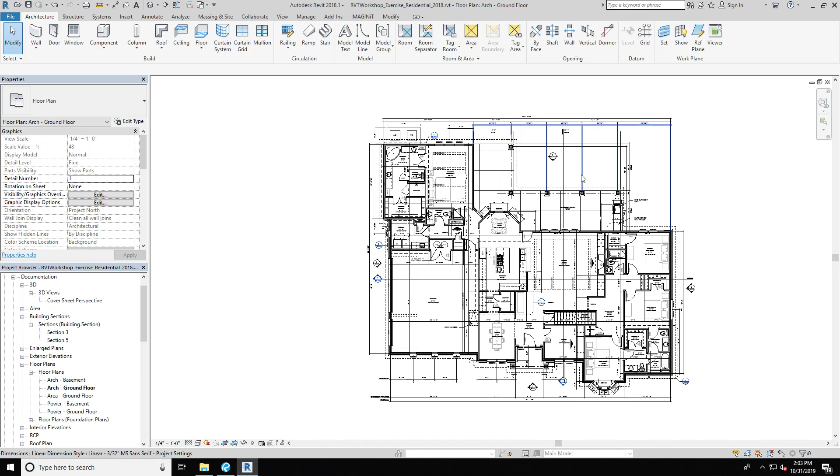This is a 3-bedroom house, and as you can see it looks super complicated, but basically this is a construction document view that will be placed on a sheet to help our contractors and framers build a house. Let me go to the 3D model view.

This is a 3D model. This house was actually built in Lubbock, and it's a huge site. I can't remember the actual acreage, but they're allowed to have horses. I modeled and designed this house in Revit for a young couple who were planning to move from San Antonio. As you can see, we can get pretty complicated with some of the elements involved—we have all our walls, our roofs included, and we can see inside that we have ceilings.

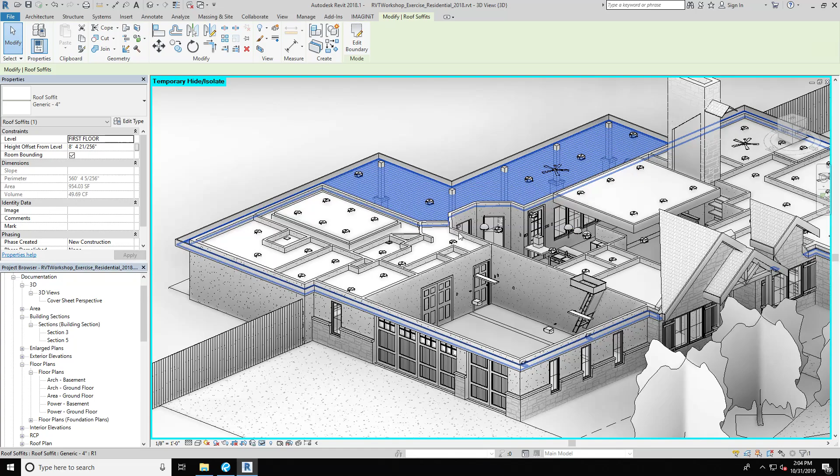Back to ceilings. We have all our ceilings in here, along with other model elements like roof soffits, interior lighting, electrical fixtures, doors, and garage doors. These are some generic model families that host or attach themselves to other model properties within the house.

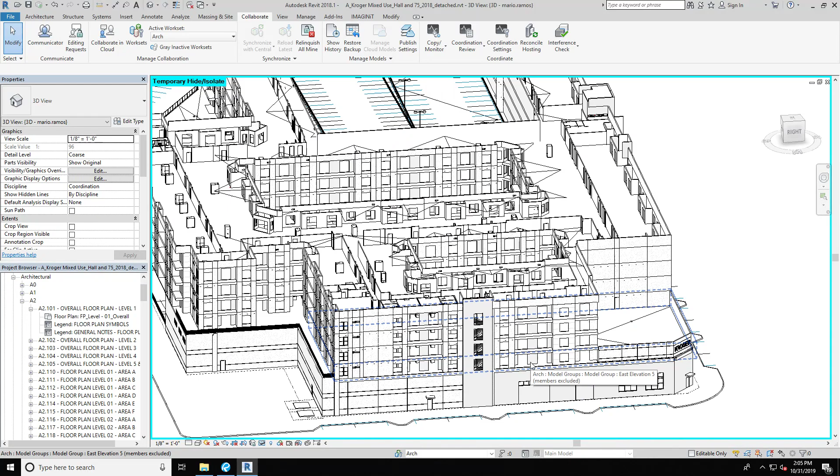The other project I'd like to show you is this huge apartment building we're currently working on. It's about 300 units and it's adaptive reuse. Basically, the apartments are being constructed along with an old Kroger that's being renovated, so it's like an existing building with a new addition being attached to it.

In here you can still see the same things go around. We still have our walls, and we should have our roof, though I think it's currently hidden. We even have our garage, some railings, and parking models.

Here with multifamily is where Revit can actually be a little dangerous in the wrong hands. It takes a certain level of knowledge of constructability practices. So if you know how to build a house, it's basically like learning how to build a house before you build it, because Revit can be a little tricky, and you have to get your construction tolerances right. In the most basic form, you need to know how to build it.

If you model it incorrectly, it can go very dangerously, and you can produce construction documents that could confuse your contractors and your clients. Therefore, whenever your framers are actually out there, they could build it very wrong, and it could lead to a very hefty fine or lawsuit. So you have to be careful.

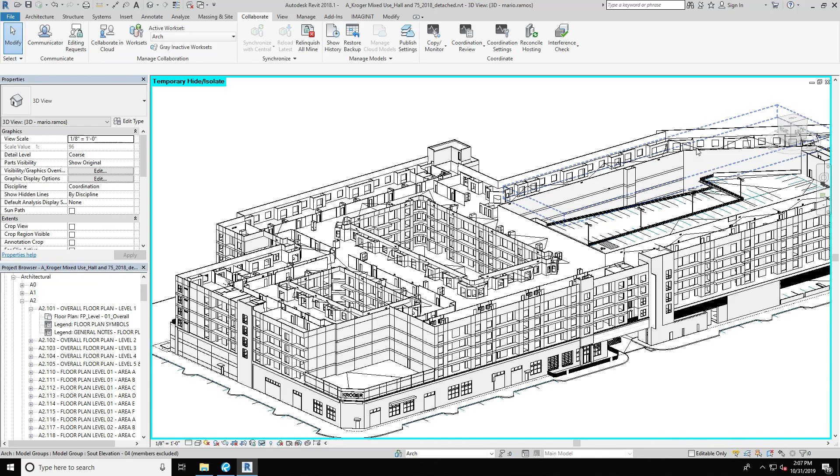Mainly what happens in our firm is that we'll have our most experienced Revit users, which currently in our office is about 4 or 5, ranging in experience building multifamily projects, retail projects, some warehouses, storage facilities, and offices, which leads into the next project.

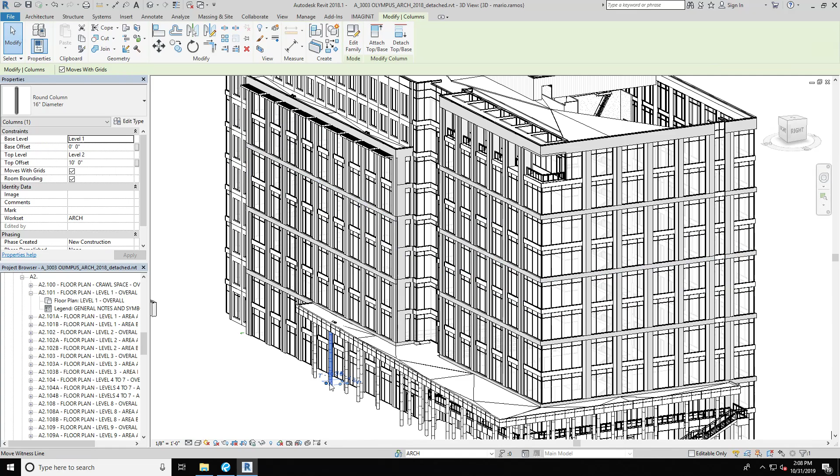We have our columns, and we also have our walls that vary in depths and heights. This wall is actually an assembly which a precast trade partner will build as a whole unit and deliver to the site in these 2-story spans.

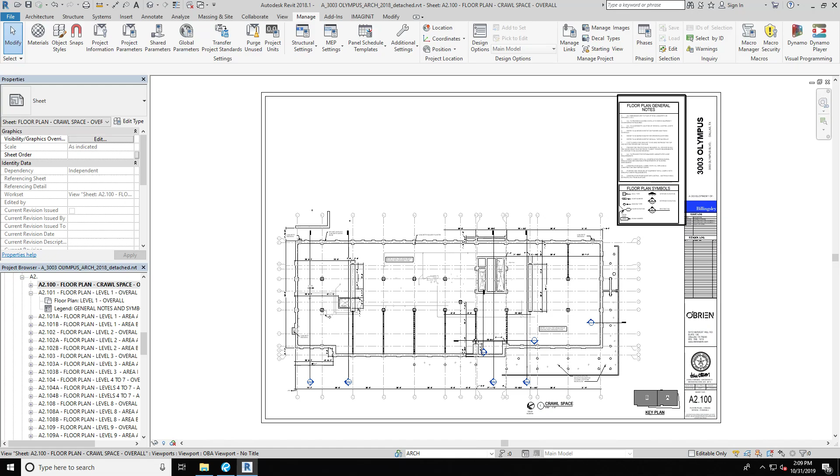So you can model a whole building in Revit, and then you can produce all your construction documents. You'll be able to put those same views we have on the side onto sheets and start annotating, adding all the other text elements, dimensions, and notes.

When it comes to creating sections, which is one I'll show you right now, you can create these really easily, and even if it shows you the most basic cartoon level of a drawing, that's okay, because the point is for you to come in after and start annotating.

My personal practice, my own way of building these things, is to build them with as much information as I can to reduce the amount of drawing I have to do later, therefore reducing the amount of hours I spend drawing, and reducing the amount of time we have to coordinate back with our people.

It really all depends too, and saving our client maybe some time. You need a team as well to help you do this. I didn't do this alone—this is a team effort, and we were able to knock it out in maybe 2-3 months.

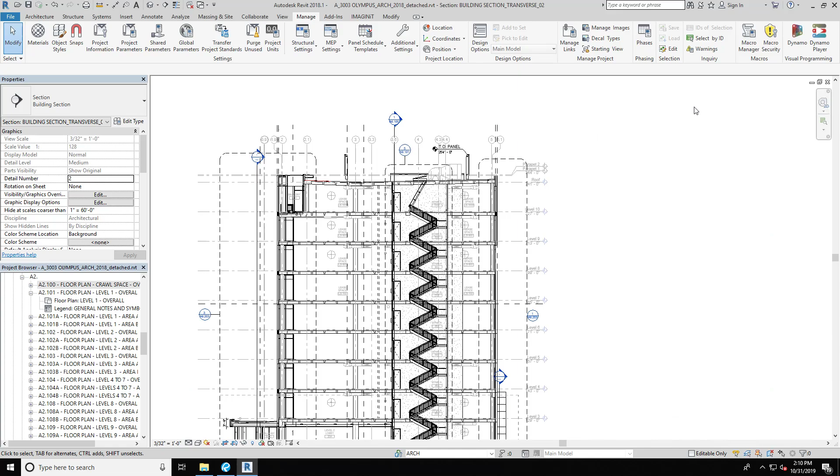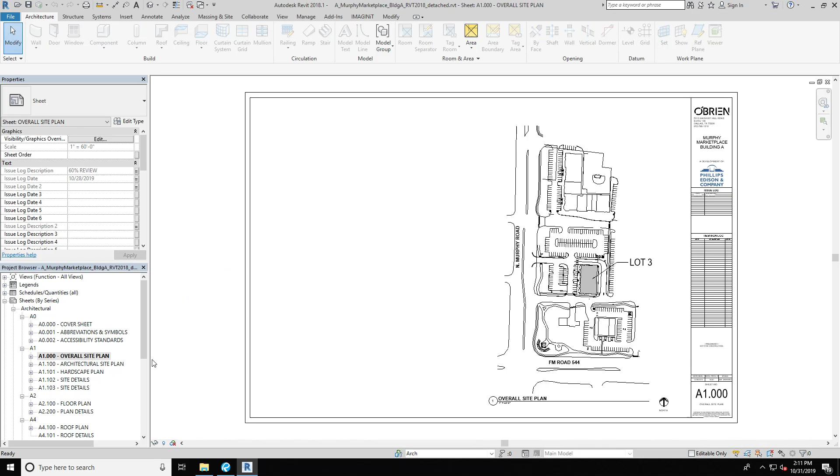And there I'm able to create all these views to show where it is in site, show an architectural site plan, and show all the details of the site. It's still bare bones. And then we have our floor plan with all the annotations and dimensions and notes.

The same thing over here on our roof. We have a roof plan that tells them where a mechanical zone is, where a roof access ladder is, where our cornice is. All this detail gets added afterwards. We have our exterior elevations, which should be popping up.

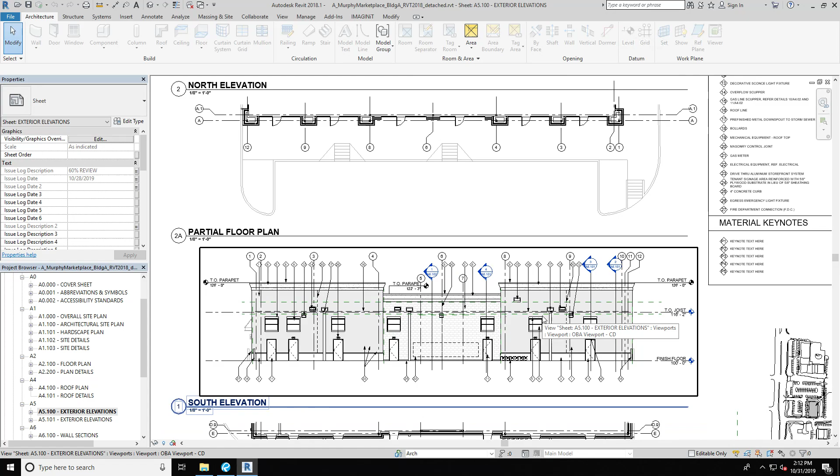As you can see here on our exterior elevations, we're able to show everything that needs to be added on here to help ease our contractors and tell them specifically what these materials are, what tolerances to follow, and then hopefully reduce the amount of questions and RFIs that we get after we submit for permit.

It also helps coordinate with our structural and MEP consultants, because they're able to

Excuse that, I think I closed the window for a second.

We're able to coordinate with them now in 3D and be aware of where things aren't aligning, like a mechanical duct is in the wrong spot, or a column is in the wrong spot, or a structural beam isn't working, or we aren't able to do a thing because of

gravity forces. We're able to coordinate that a lot easier versus 2D drawings in the past, where we would have to guesstimate where things were just by seeing them in plan and visualizing where they would be in a section, I guess, in 3D space.

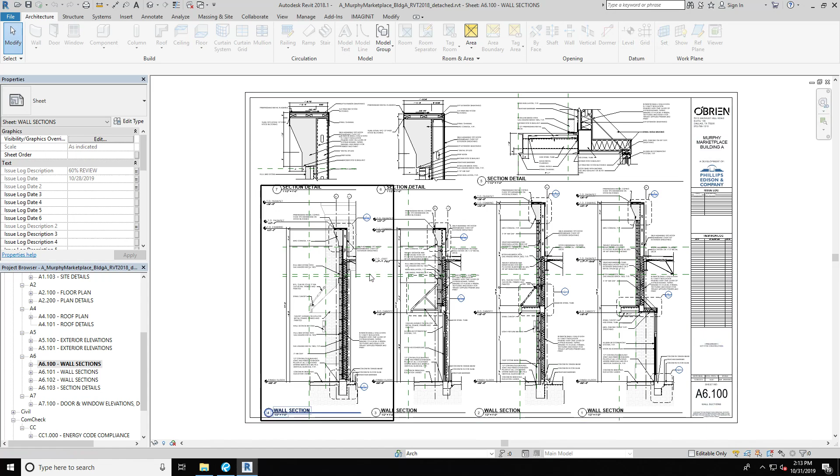So from all that, we're able to create all these sections, and as you can tell, I could select all this stuff here, filter it, and say I just want to hide all the detail stuff. Actually, let me do it backwards. So this is actually most of what's modeled right here. Everything else is a detail component that we get to add on top of it.

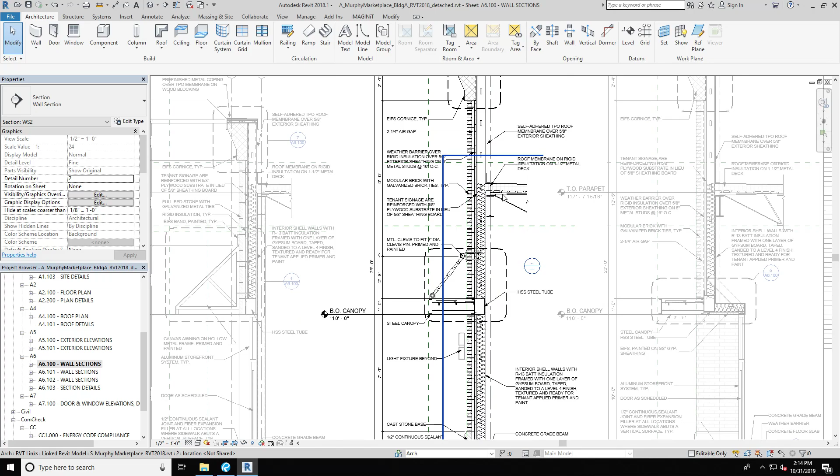And this is our structural model, which we've loaded in the back to coordinate with them and have them tell us where our top of joist elevation should be. We actually tell them, they just match us.

And then from these views here, we're able to create new views where we'll come back in and detail it. Refine the detail, actually, is a better way of putting it. We'll refine the detail to coordinate with the people who will be building this so that they can get it right.

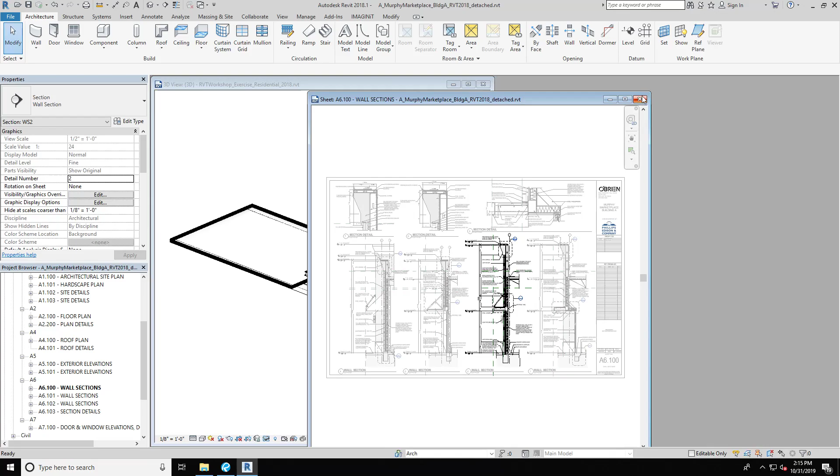Now, I don't want to spend too much time on that because we actually do have to cover how to model most of these things, and I want to be cognizant of your time. So let me go ahead and close all these things. Just give me a second. Close. Nope. Great. So real quick, let me see what's going on. Sweet. Okay.

Alright. So for this assignment, it looks like what we have to do is build a 32 by 32 foot house. And we'll start off by creating a new project. And the easiest way to do that is, we have Revit open. Let's just pretend I already went through and opened the shortcut. And so when you go to open up Revit, this is the first page you'll see.

And what you'll do is go select a new project, and the first thing you'll get asked is to pick a template file. Template files are just full of all the information you'll need. They'll have your walls, roofs, floors, and other basic detail and model components that you'll need to help you model your projects. In this case, we don't have any templates loaded because our template files have actually been moved to a separate location.

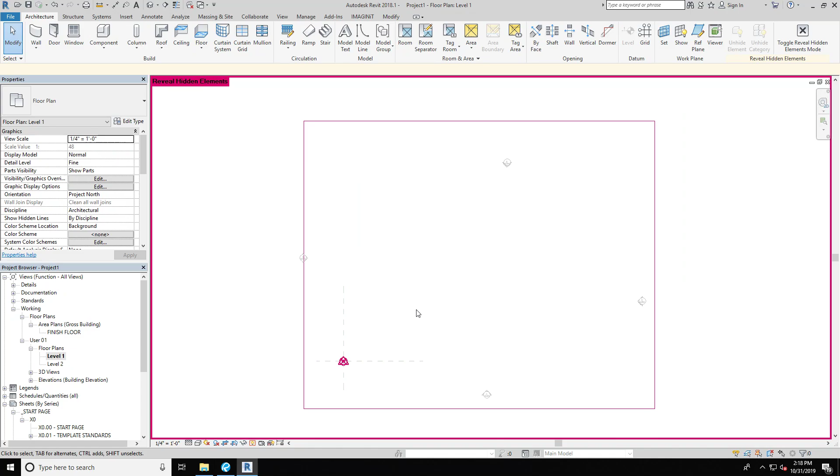But what I want you to be cognizant of or aware of is these two little things here, the circle and the triangle that keep shrinking the closer I zoom into it. Those are your project and survey points. And basically in 3D space, or if you were to think of your coordinate system, that is your 0, 0, and this would be your y, and this is your x. And of course, jumping from the screen to you is your z axis.

Hold on, what's going on? Colt, something wrong?

Oh, that's a great question. So the defaults are, yes, they're construction, architecture, and MEP. The best one to use, it depends on what firm you work for. If you work for an MEP engineer, then you would start with an MEP template. If you work for a contractor, you would use a construction or architecture template. And if you work for an architect, you would use architecture.

Sorry I didn't cover that. That's a great question. I should have covered it, because those are the templates that come out of the box with Revit. The one that I opened is a personal one. They should go ahead and use the architecture one. Is there anything else?

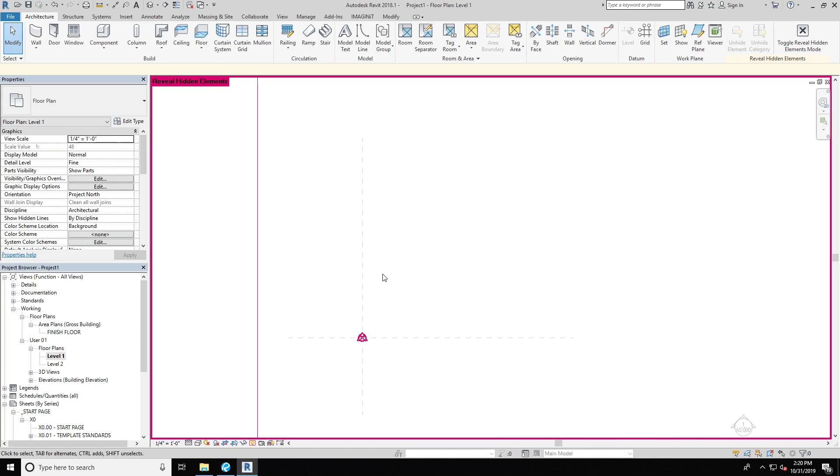Okay. All right. So I think that should cover it for templates that you should use. Okay, great. I hope I answered that. My bad.

All right. So where was I? So I was talking about the project points and the coordinate system. These are your reference points. They help coordinate with all of your consultants. So whenever you share or exchange models, which still happens, you're basically trading your models back and forth to coordinate how things align, to coordinate your structural grids, your structural columns, floors, roofs, anything of that nature with, let's say,

your structural consultant. Your MEP consultant would only be modeling ducts and plumbing and wires. Maybe not even that. That's a whole other level that they may or may not want to get into. But when they're modeling all these things, you'll be able to see the pipes running through your building, all the ductwork. If they're crashing through something that it shouldn't be crashing, then you can point it out and have them fix it. So whenever you reload the model, you should have things as they are working.

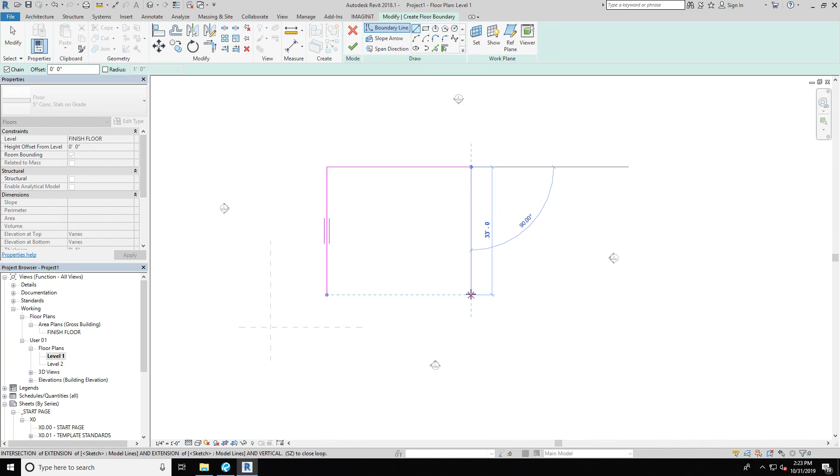Alright, so let's model a floor. To model a floor, we go up to our architecture tab once we're in the project, and we'll go over to floor. Now in the floor command, everything else is kind of grayed out, and you will mainly be focusing here on this thing to start drawing it. You can start by drawing a line and then carrying it over, so you have a box. Basically the dimensions aren't correct, but if you pick your lines, you'll have these temporary dimensions that should pop up, which you can then adjust. Whichever one you pick is the one that will move.

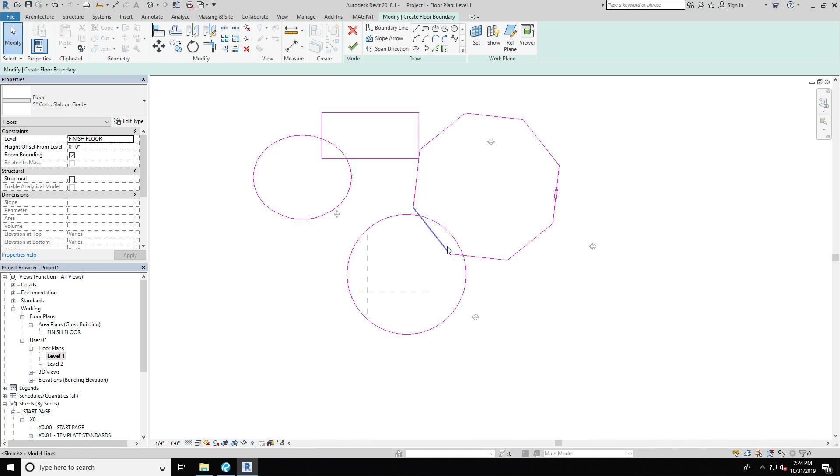But besides that, you can also draw circular floors. You can draw polygonal floors; you can change the sides over here. So let's say we want an 8-sided house. You can draw oval floors. There we go. And you can draw squares and rectangles. Now let me go ahead and delete these.

So for our purpose in drawing this house, we'll start from our point down here at the 0, 0, and then carry our floor slab edges this way. So this one is 32, we just want to make sure, and this one is 33, but we'll change it to 32. And there we go. And to finish the command so that you start modeling your floor, you just select the green checkbox, and there we have a floor. We can see it in 3D, and that is what it looks like.

Now let's say you want a different type of floor. You select it and you go to your properties tab over here. And this tab will show you the properties of all the model elements that you will select in Revit. And currently we only have one floor type, which is a 5-inch concrete slab on grade. But let's say we wanted to make it 6 inches. Well, we can do it by, let me do that again. We can do it by selecting it.

We hit this edit type button, and then we get this dialog box. And as you can see, it's a system family of floor. Here's the floor we selected, and we have these options to rename it and duplicate it. We'll want to duplicate it, and then we'll name it 6-inch concrete slab. And then go back.

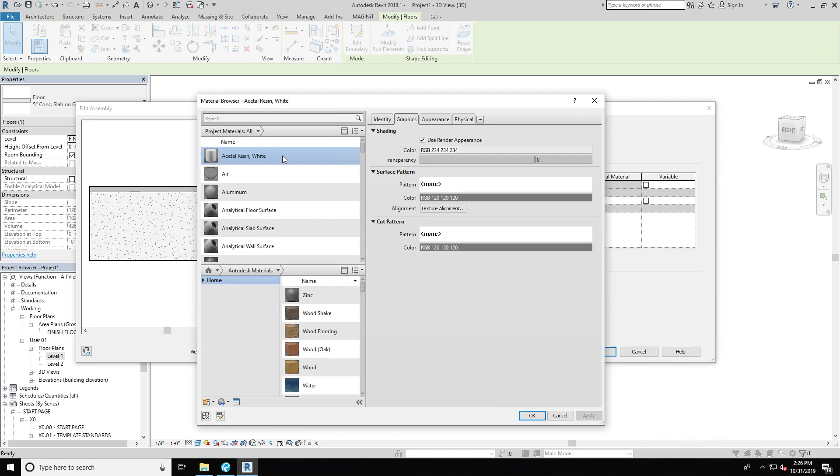and we can select a material by hitting this little guy in the material column, and then we'll get all these material types in here. I don't know necessarily what kind of glue they need, but let's say it's whatever this material is. We'll make it up for now. So we have a 1/2 inch of that, and you can see that over here in our preview box.

Well, let's say we also need to show our carpet. That may be another 1/2 inch. And there we go. So we have another 1/2 inch of something. It's not necessarily called carpet yet, but we can create it. And carpet, I do know, is in here, so we can find it. And there it is down there.

We'll double click it. If it's down here, you just need to double click it or hit this arrow so that Revit can pull it in from the program files into the project so that you can use it. Then once you've selected it, just hit OK, and there we go, we have carpet. So now we have a 6-inch slab with carpet.

And currently the view setting is set to show just a white line, which I think is called hidden lines, and we can change it to be more realistic or show shaded colors. Oh, that was it. Huh. Well, there's hidden line, and this one basically shows you the white background or white objects, and a wireframe view. And then we can also change the settings from fine to coarse to medium. But let me change that back to hidden line.

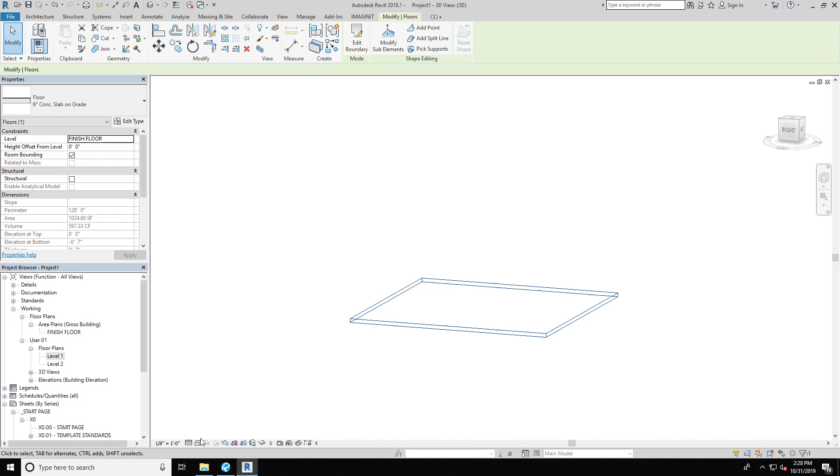There we go. So we modeled our floor, and it's 32 by 32 as we remember. But now we have to create our walls. And let's say they're 2x4 studs. We'll go back to our floor plan, and then we'll go to the architecture tab, and we'll select a wall.

There are many options on how to create a wall. Oh, and there are structural walls as well. We won't focus on these now. We'll only focus on architectural walls. And so as you can see here, for walls we do have a bit more. We have our basic walls, our curtain walls, and our stacked walls. Our basic walls, in the shortest terms, are just basic. They are one layer and one material carried on vertically.

Your curtain walls have the options to add panels and other model elements like the mullions, the glazing, and anything else you can think of. One thing that I do want to stress is that even though Revit says these things are these things, you can also challenge that and use certain model elements in place of others to just create something.

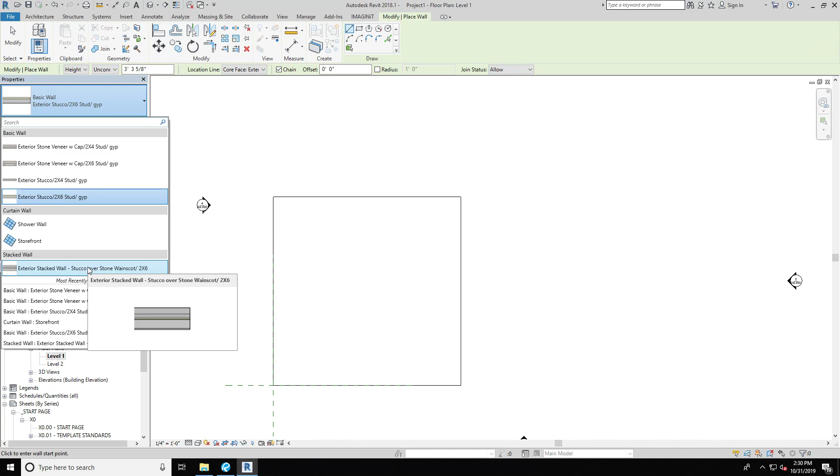And then our stacked walls are a group of basic walls that you can stack on top of each other. You can stack as many as you like. You can go from 2 to 20, and many people use them when, let's say, you have a wall that has a stone base and a cap, and then on top of it, which this one should have but doesn't, we'll add it. Oh, it should. Why doesn't it have it? What's the height?

There we go. And then it has a basic wall of stucco above it. Now let me delete it. What I did there, actually, because I haven't covered this yet, was tell the wall in its properties that its base constraint is the first floor, which is this work plane that you see down here, which I will show just now. This is our first floor work plane. And that's our base constraint for this wall, which you can see reflected here.

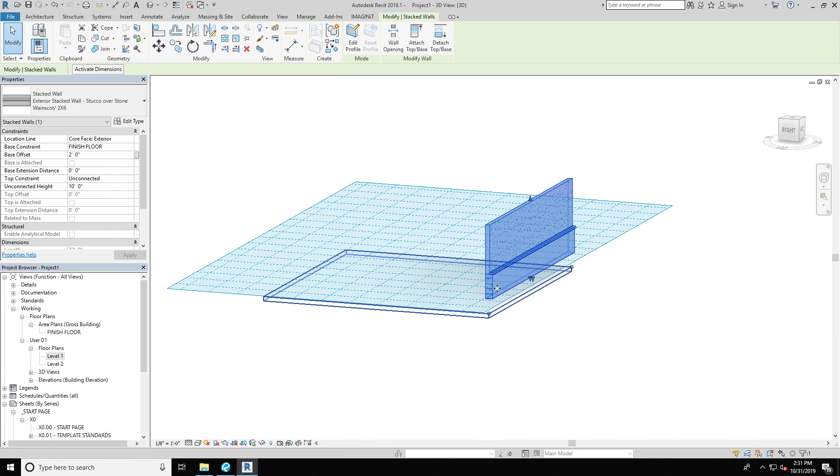You can change it so that the base constraint is now the top floor. And then it has a base offset, which you can, if you wanted to, offset it, let's say 2 feet from that plane. And no matter how many times you change that level, so let's say this plane is no longer, let me go to an elevation to show that. Let's say that plane

Hold on, I'm being told I'm a little fast. Colt, do I need to recover anything again? I forgot the lag time. Will do. So let me change this one. Yeah, let's do that.

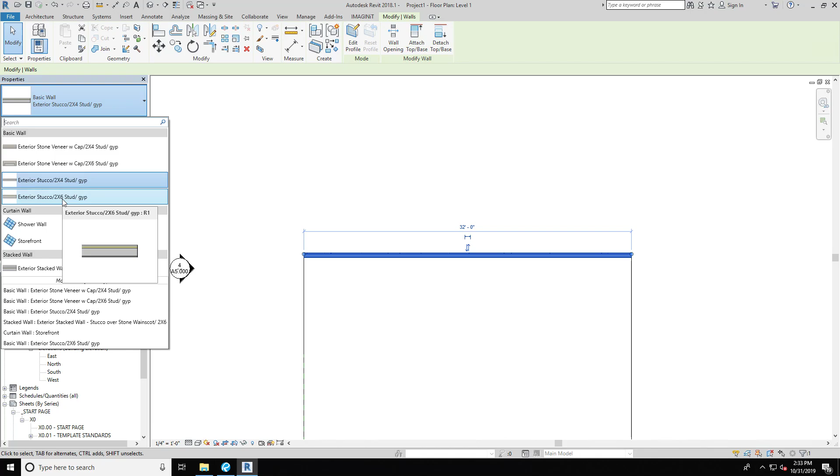All right, so let's take a step back. We're gonna draw a wall, and we've already chosen the wall. It's already built and assembled the way that we need it. Let me change that back to 0, and I'll change our top constraint to be our top plate. So that means that our wall will stretch from the first floor to the second level, which is our top plate. And what we want to do is draw the wall, but we want to draw it with this edge of the stud line at that edge of the slab.

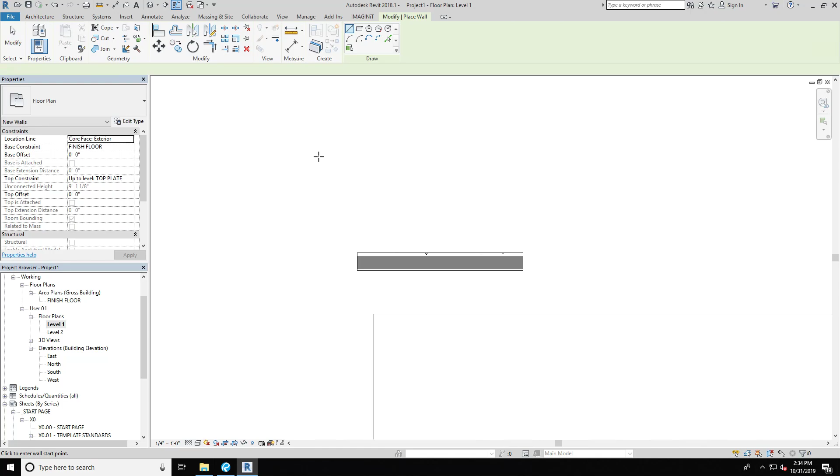The reason being is because the normal setting for these walls is to draw the wall at a center line. And basically what it did there is draw the wall taking into account the entire width or depth of that wall and giving us its center. So we drew it from its center, versus this wall, which is at the edge of the stud where we need it to be. And this type of wall alignment is called the core face exterior, which will draw it at that edge.

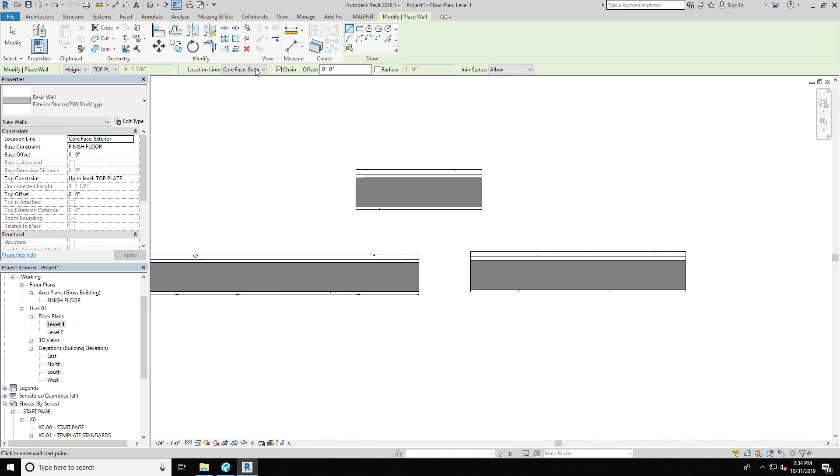But let's say we want it to be the interior. Well, that would be the core face interior. Now we've drawn it, but with that edge as our defining line. And we can also do it from the finish face. That did it from the exterior side of the stucco. We normally don't want to do that, especially when it comes to stucco walls, because stucco varies in thicknesses that it really doesn't help.

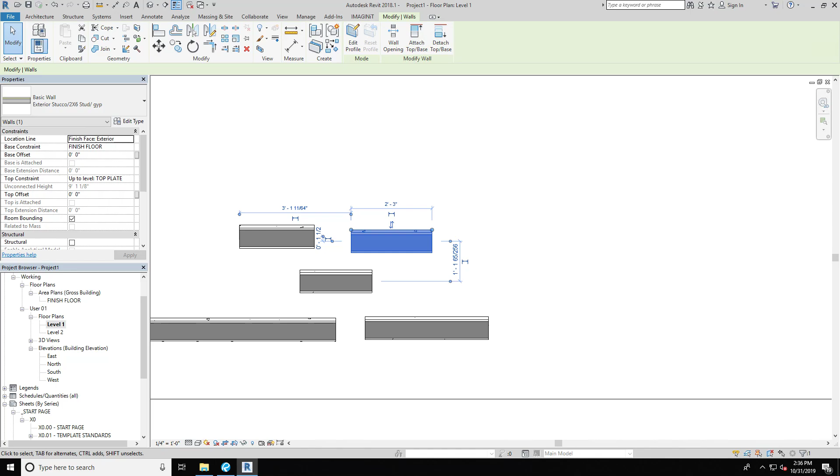Okay, so I think I covered the wall alignments. I'll cover just the last one just so that we all know, because there's a few more that we need to cover. So we covered the wall center line, we covered the finish face exterior, the core face and core face interior. Remember these because I'll run through them a little bit more, how they relate to how you build your wall. So the last two we need to cover is the finish face interior and the core center line.

So the core center line is actually the center of your core, your core being the assembled part of the wall that is set to be inside the core parameter, something that I'll cover in a little bit that will make more sense. But you can also draw it from there. And the last one is the finish face of the interior wall, which is right there. It's drawing the wall from the inside of the gypsum board, and that's okay.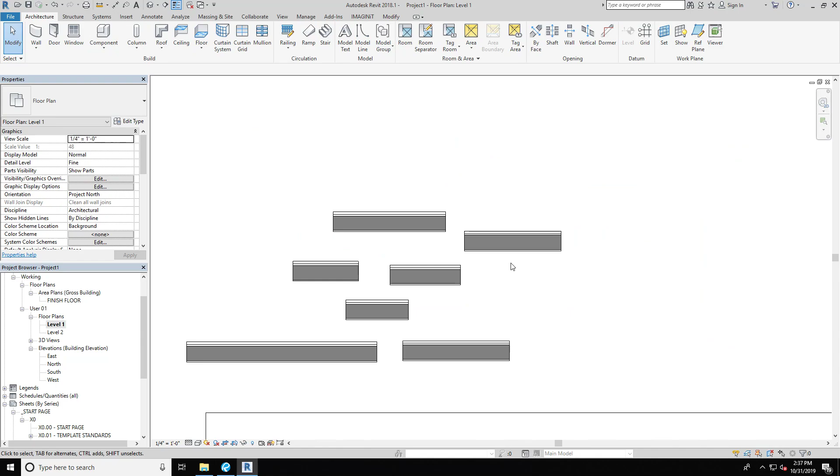Best practice is to model it from the core face exterior or interior, depending on how you work. The reason I say it's the best idea is because normally your structure doesn't change, but your finishes will. So let's say, for instance, your client may want stucco one day, but then the next day he changes his mind and says he wants metal panels.

And if you have a couple of walls set to finish face exterior and you change the materials for all those walls, they will flex very differently, and it will annoy you, and it'll create some errors that you may not want. So let's say we drew all these walls. These are interior face. Instead of redrawing them, we can change that by the location line right here.

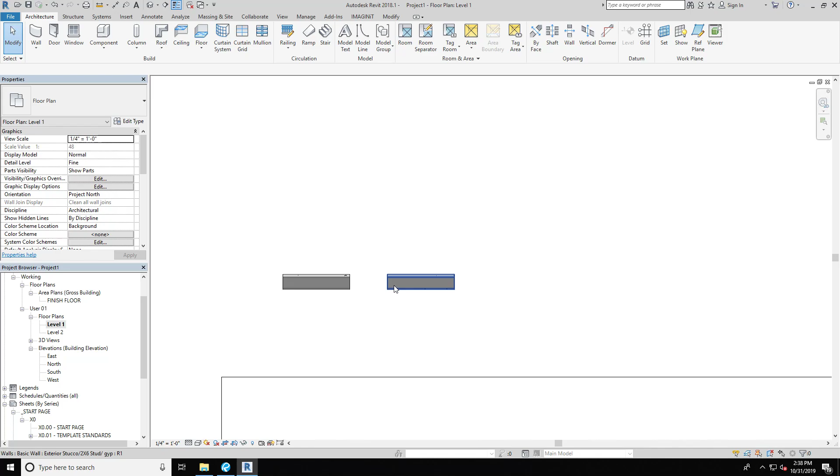We wanted core face exterior, and there they go. They're both changed. Now let's say we ran into that instance of our client wanting metal panel, but let's change this one to be the center line of the wall. So there we go. That one's center. This one's the exterior core face location line.

Now let's edit the type. This is how we build our walls, and we get a preview. Well, we don't normally get a preview, but we can do it by hitting the preview button. And then you'll see we have our named wall here. We can duplicate it, but let's say we want to change this type.

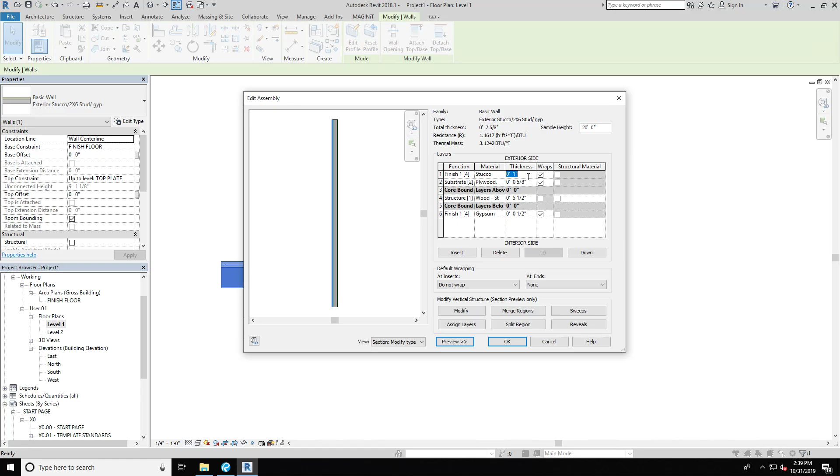Let's say we no longer want the stucco to be 1 inch. And let's say instead of 5/8 of plywood, we want 3/4 inch of plywood. And let's say, for instance, too, we don't want to use 2x6s, which are 5.5. Let's say we're using 2x4s, and those are 3.5. We're using 1/2 inch gypsum board on the inside, 3/4 inch plywood sheathing, and we'll keep that as 1 inch. I don't want to mess with it.

We'll hit OK. OK. And you saw how the walls flexed. This one flexed by bringing in the materials towards the edge, the core face exterior edge. This one flexed from the middle, so it brought all those materials inward. They compressed inward rather than change as this one did.

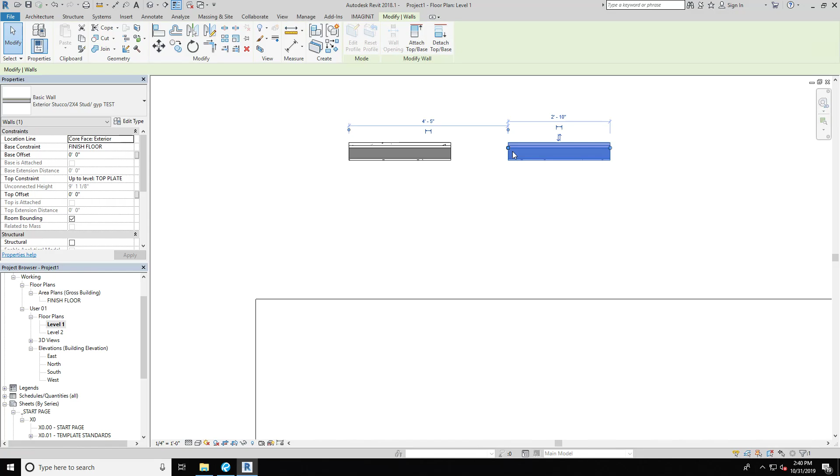So now let's build our wall. Let's say it's that 3/4 inch or that 3.5 inch. Before we do that, let me rename it. It's no longer a 2x6, it's a 2x4. Oh, we have that one. 2x4. Test. Boom. Oh, and just so you know, your wall command is WA. So you don't always have to go up to the button and find it.

Now we can make sure that we're going to draw it from our core face exterior by going here. It's going to go up to our top plate level, and then we can start drawing there. And as we pull it, we can see the edge of the stud is going to the edge of that slab, and it's 32 feet by 32 feet. And there we go. And they all joined easily.

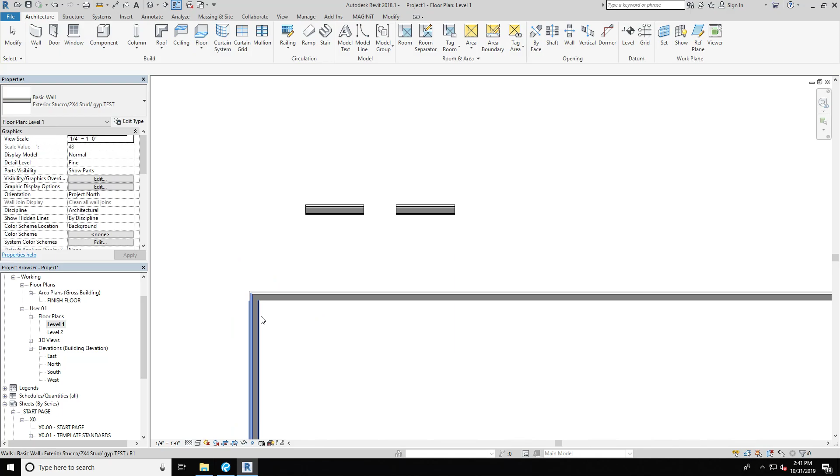So normally this is how this house would be built. We have our slab, which then we'll have our footings beside it. And we'll have our walls with only the stud sitting on the slab. And then we may build a second slab edge or a ledge for our finished material, if you choose to do so. It's not typical.

Colt, before I continue moving on, are there any questions about walls, location lines? Okay, well then I'll go to level 2.

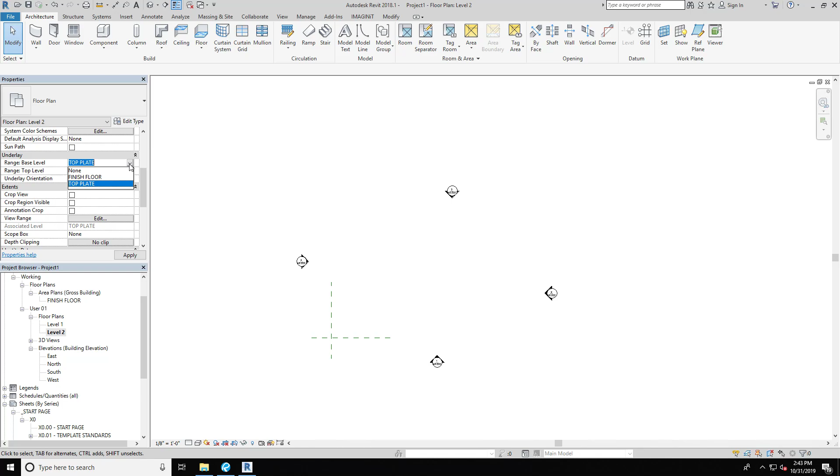Right here I'm on my second level, and this level is where I'll be drawing our roof. And as you can see, we can't see what we modeled previously below. That's because our work plane is set to show only what we have here, but that's okay because we can go down to our properties window, go to this underlay tab, and we can have that floor plan or view that we're on display the view below it, and so we're able to see what we modeled beneath.

Now let's say we want to model a roof. Well, the roof is right here, and same thing, it's still in the architecture tab. Scroll over a couple of buttons and we'll find our roof. And the roofs work similar to floors, where you can draw them in plan. You hit the button, and then you'll go into the command, and this is mainly where you'll be working in the draw tab. And you can do the same things, same commands as the floors.

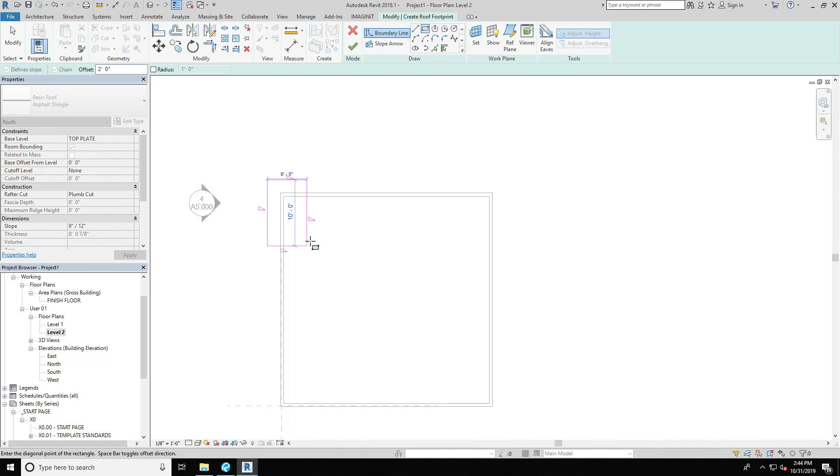You can draw them by rectangles, circles, polygons, ovals, but really what we want to do is just draw a square roof to match what we have. And then we can offset our line, let's say 2 feet from where we draw. So let's say that's our point of our exterior face of the wall, and we drag it to the other point. And it was smart enough to know that I wanted to draw the line offset 2 feet from that face.

So, but you can do it multiple ways, and the command will go away once you get rid of it. But this is what we would have drawn. But this is our 2 foot offset, or 2 foot overhang. But it also has the command to give it an overhang. Okay, so let's see, back to 2 feet. And there we go.

Okay, so there we go with the roof. To answer your question, Colt, we don't normally build with generic walls, because if we already know what type of materials are going to go in the project, we don't want to build with something that has no real materiality. Generic walls are basically like marshmallows.

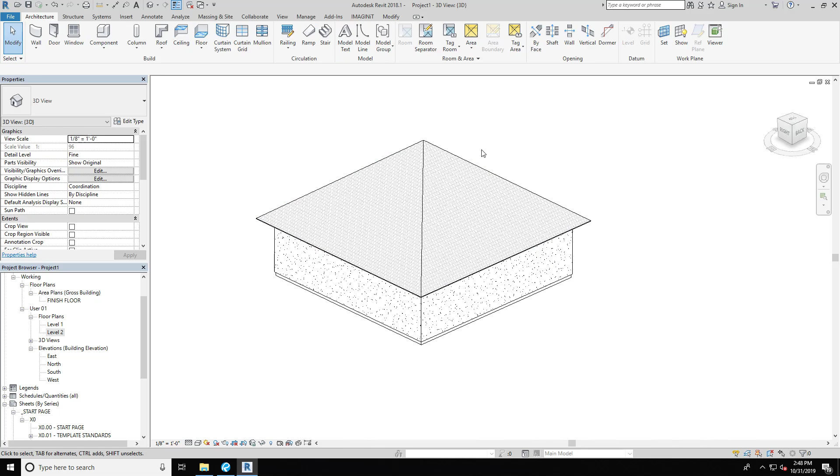So now that we have this weird hut, we're able to see that this roof was modeled all to go at a slope of 6/12 from the edge over here up to that point. The other walls, the other sides of the rectangle that had that defining element, also went up to that level.

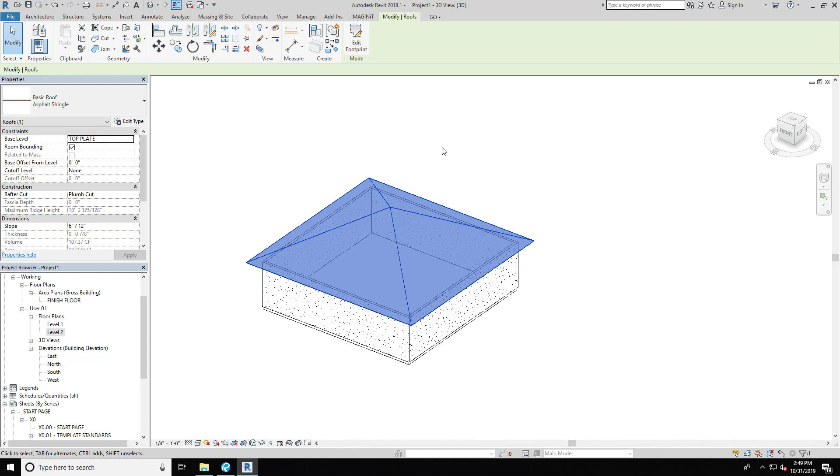And then we can change that here if we wanted to. So if we wanted to go to a 6/12 roof, you can change it there too. But let's go back to our roof to edit it by going up to Edit Footprint. So we know that this is going to go up 6/12 and this is going to go up 6/12.

But let's say we don't want it. We want a regular gabled roof. So we select both lines. To select both lines, you just hold down the control button and you see a little plus sign next to your cursor, and that will select both items.

Then in order to remove the slope from those lines, you would uncheck this box here, the define slope. Once you uncheck it, you can hit OK, and there you'll see your roof. Your roof is now a gable.

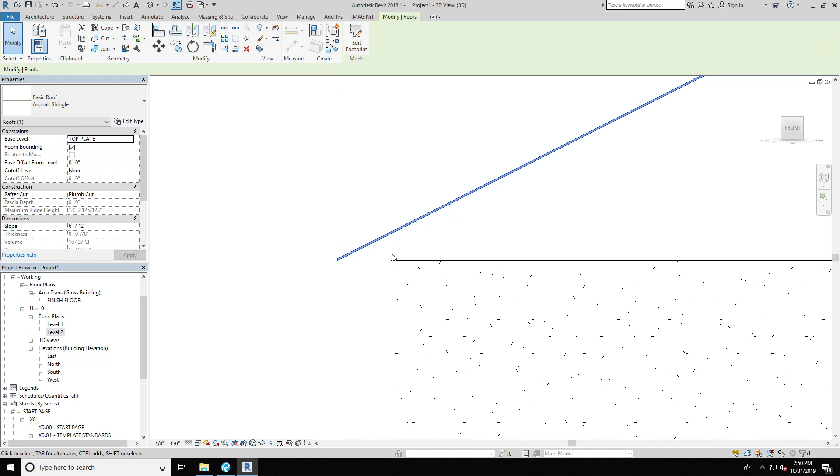There we go. And it's on our second level, our top plate. We can always move it down if we wanted to. Well, actually, we can move it down to meet our walls, but that's not normally how roofs are built, and they normally have rafters. They have some structure.

This is just a substrate, and the finished material. So roofs work the same way as walls. We can create them by going to their type and editing the structure.

And so now let me insert structure here. Let's say we're using 2x16s, which I would assume is 2.5. Whoops, no it's not. 2x16 is 15.25.

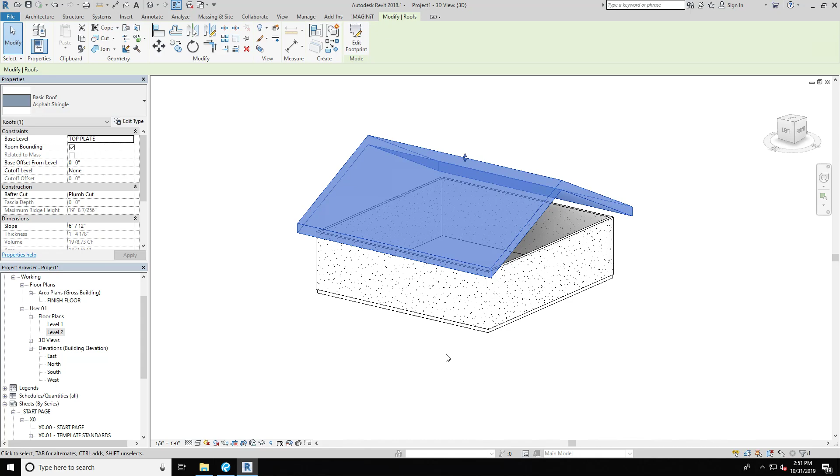Boom. So now we have our roof with our rafters, and it's super basic modeling. You can go back in later and add all this stuff, but for conceptual purposes this gives you an idea of how the roof would work.

And then once you have your roof, you can attach your walls to it by selecting your walls, going up to this modify wall tab, and select attach top base. You can choose to attach it to a base or to a top, which in this case would be this roof. Once we select a top and hit that, the wall will immediately go up to meet the bottom of that roof.

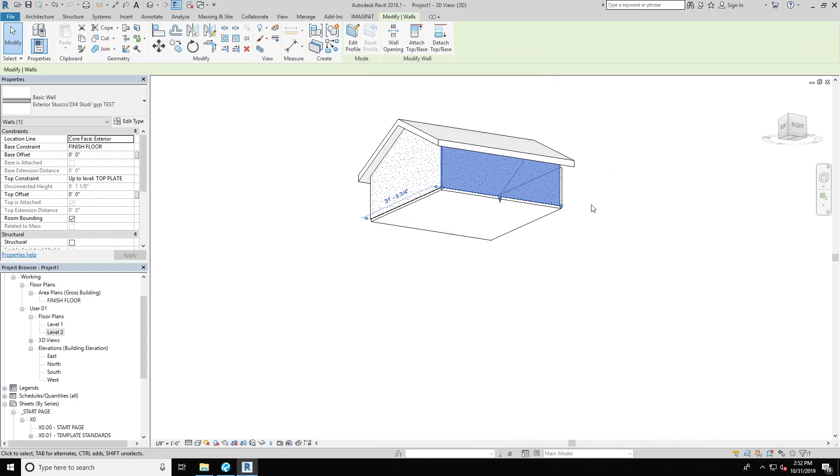And to make it faster, we'll just do these two. Boom. So now we have our generic stucco house. And let's say you also just want to have a different material there. Let's say we want stucco and that type. You can easily change it too. You can change your walls to be different kinds of walls.

And this is the front of your house. Okay, so now that we've covered the roof, now we can cover by adding doors and windows to the project.

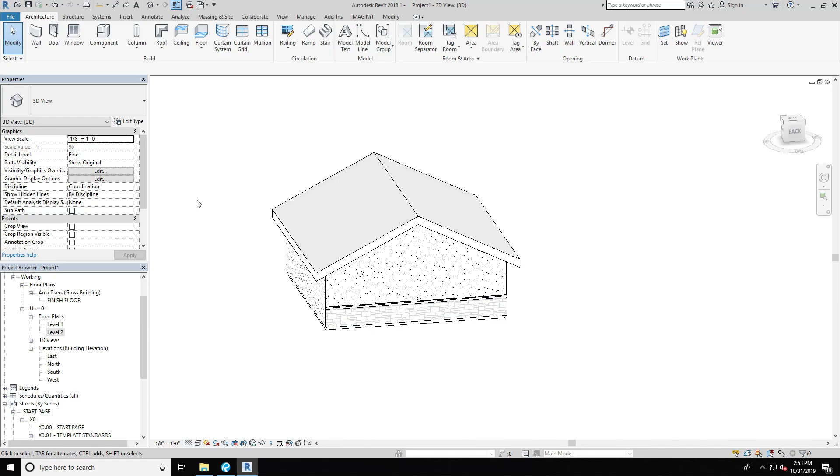Say we want an entry door to our house, we would select a door. The same thing applies here when selecting model elements. We have different options of doors to place here.

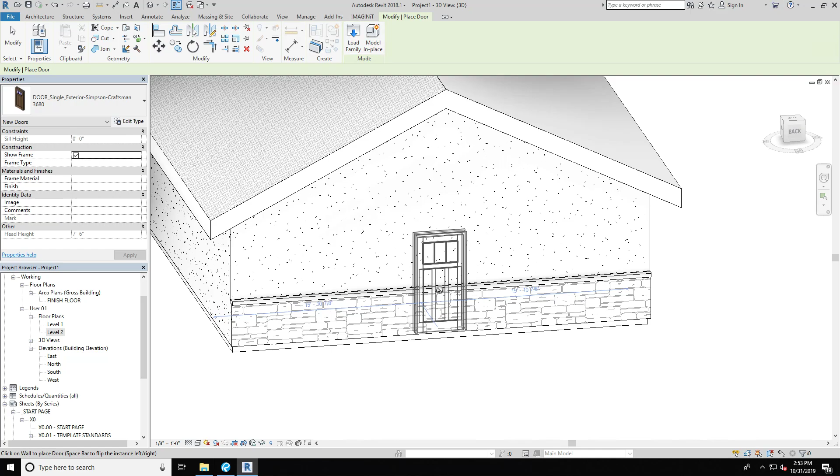Let's say we want this door here, which is a 3'6" wide door by 7'6" tall door. You can see that this door is immediately wanting to attach to this wall, and the higher I go is a different level that it will pick. But when we select it, we'll place it either in 3D or go back to our floor plan view and add it there. The command to bring up the shortcut for your door command is DR.

Doors will only be attached to walls. So as you can see, we get that no symbol there, like no smoking or whatever. It doesn't want to attach it anywhere else. There's nothing to host to. It will only host to a wall, and then before placing it, you get a preview of how that door will look. So you can place it here.

If you press the space bar, the door may shift side, since it's on this side of the wall a little bit, it'll change sides of where the swing is. Bring it down a little, it swings in, and it could swing the other way. But let's place it for now. So we have our door, and there's a little bit of issues with the family itself there. We won't worry too much about that right now. We just know that we have a door, and we can see it in 3D.

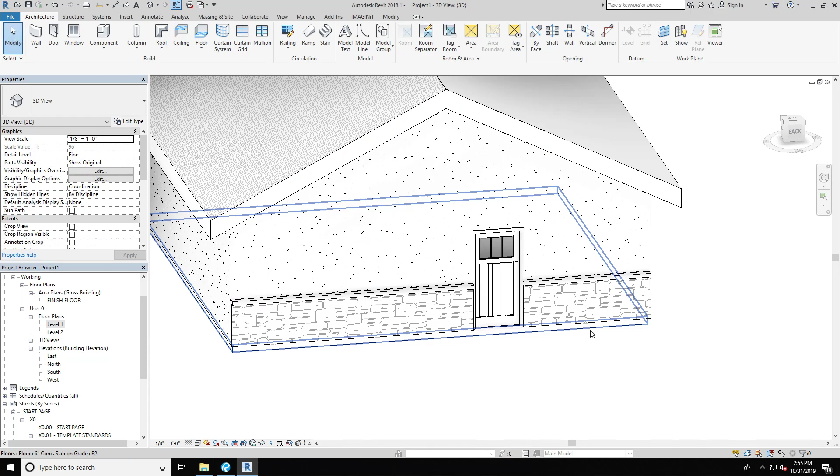Now we can also do the same thing we did with the wall and change the door type. Maybe we want that type of door as our front door. And if we wanted a different kind of door, like a custom door that we want to make, you can change those things here. So let's say we want a 10-foot tall door for whatever reason. It'll change there. It's 10 feet tall and it's 4 feet wide. There we go. But just remember, as you're doing this, make sure to rename or duplicate your family so that you can organize what you're doing.

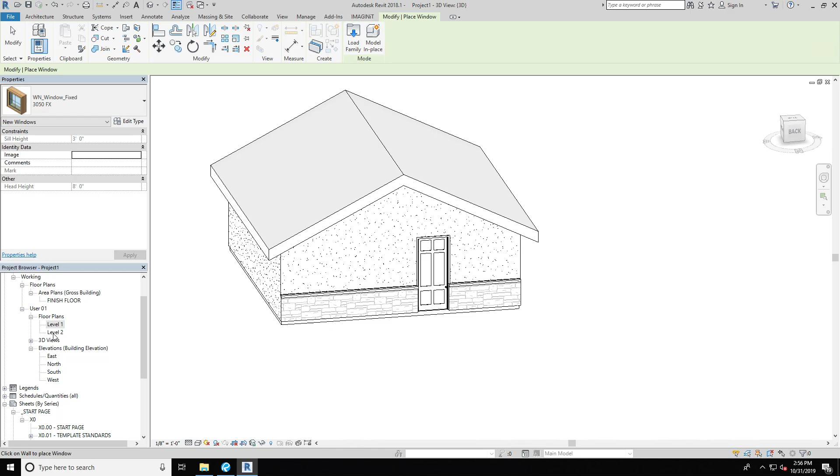We still have our 3080 door. Now let's add a window. Here there's a few families that I have preloaded in here. There's a 2x5 window and a 3x5 window. Let's just place a 3x5 window, and we'll do it again in our first floor just so we can have a little bit more control. The shortcut for the window command is WN. So we select it. It's gonna be 3 feet off the floor, which that's the sill height there.

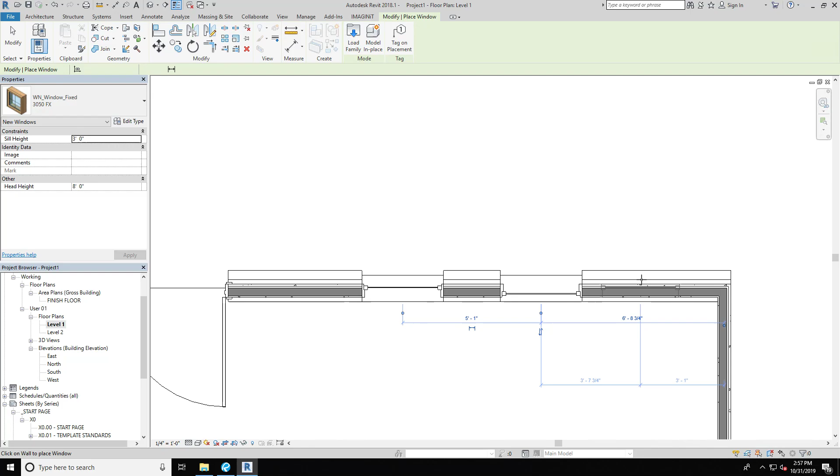And we've placed our window. Windows act the same way as doors. They will only be placed in walls. So we have our window there. Let's do the command again. You can also change on which side the pane of the window is going to be. So if you want it inward, which I don't know why you would do, but let's say you did, it would be on that side. This side inward, outward. And there you go.

And then we can look at it in 3D. And then we can see there's some issues there. The window is too low and it's cutting our stone weird. Let's say we want it aligned with that top part up there. We just move it up. Maybe it's 3'4". Maybe a little higher. A little lower. They're kind of lined up there.

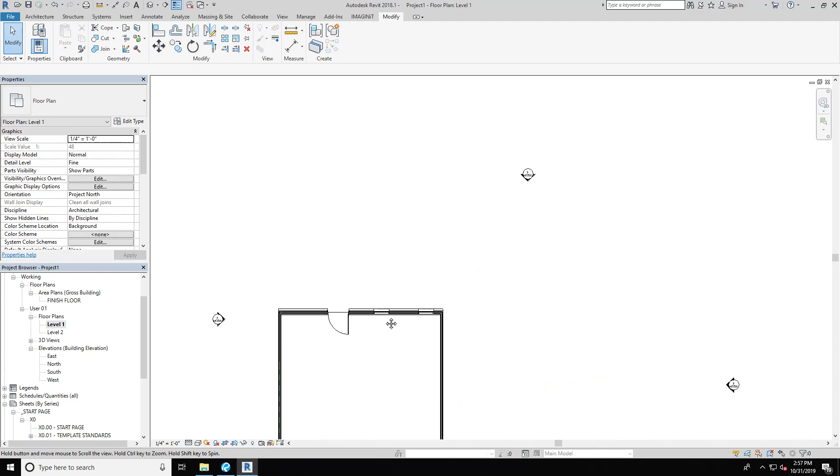So now we have our windows and our doors. Now the other things we have are interior walls. And those, I'm sure you can model the same way, or you have an idea of how to model them. You just hit WA again.

Make sure that all of your settings before you draw a wall are correct: your location line setting, your bottom constraint, your top constraint, and then you select the right wall. Now, let's say we don't have a 2x4 wall with gyp on both sides. We'll just recreate it here. We'll call this one test just for now. And let's say we have to build it. And here's where these location lines come up again. So we're assembling a new wall here.

And what we have is our core here, which is the main structural part of the wall. We can never delete this. We can move it around, but we would have to have something in there, and that is what defines the core face interior and exterior. These would be our finishes, and they can be as thick as you need them to be. For now, we don't need stucco for an interior wall. We do need gypsum board, which is this type of material, and finish down here, and it needs to be the same, 1/2 inch. Then we would change this to finish. You don't really have to, but it's recommended for organizational purposes that you do.

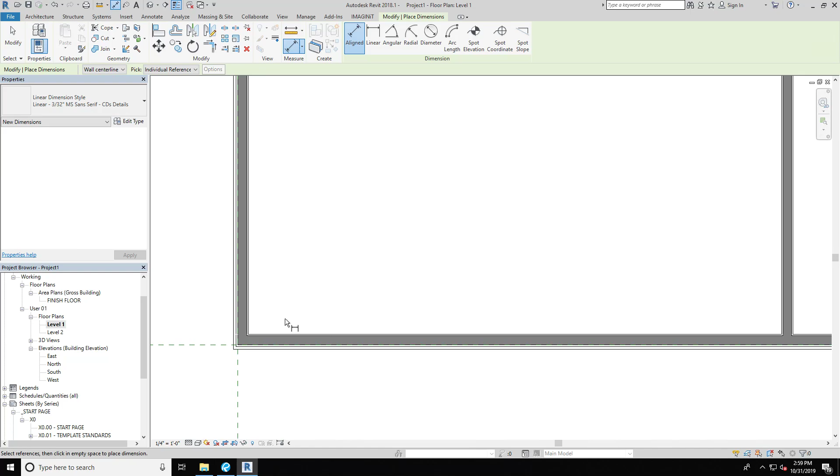So now we have our preview of our wall here. It's a 2x4 wall with gyp on both sides. And we can hit OK again, and then we have our wall, and we can start drawing it wherever we need. So there we have our wall. And since we're in a floor plan view, we can add dimensions, and we can change things or make sure that things are the way we need them to be.

When I hit the dimension line, it immediately wants to snap to the center of the wall. You can override this by hitting the tab button and selecting your edge of wall there. You can also view where it's wanting to snap by checking - well, I can't really show you, but at the bottom left corner is where it tells you what it's referencing to snap to.

So there, when I hover over the center, it's hovering over the basic wall there. We want this side of the wall here, and it's recommended to dimension always to the same side of the wall, or when you run a dimension string, make sure to dimension the same side of the wall on all the walls except for the exterior. So you would go there, hit tab, select your edge of stud there, and then since we're on the exterior, we would select the exterior side of the wall.

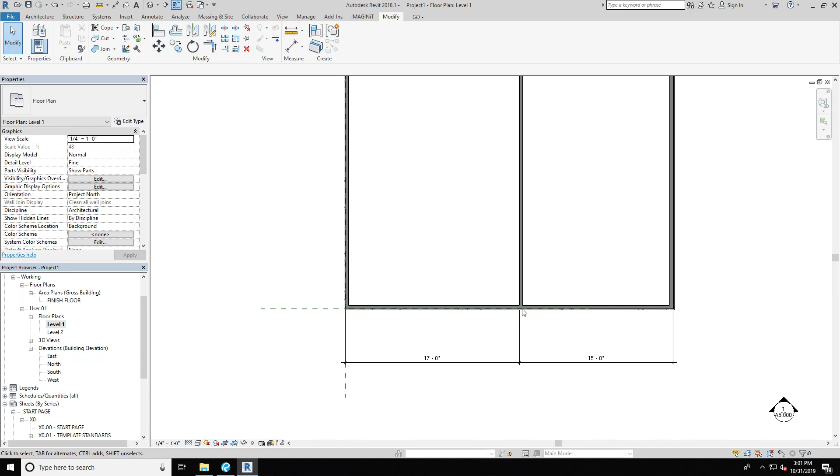But we don't like these dimensions, and our framers wouldn't want to build this. So we can select the wall, and you can see how the dimension string has highlighted blue, which means that we have the ability to change it. And so we select our wall, and then we can type in a new number here and say that's 17 feet. So now we know we have 17 feet on this side, 15 feet on that side. We can do that with all the walls, as many walls as we need to. We don't have to build it right the first time, but we can always correct it.

Same thing, dimension to the same side of the wall. You would have to hit tab a couple of times and then just carry your dimension string off to the side. We don't want that dimension. Say we want 9'10", we type it in. Same thing here - 9'10", and we want this to be 7'10". I don't know what these rooms are, but we have them now.

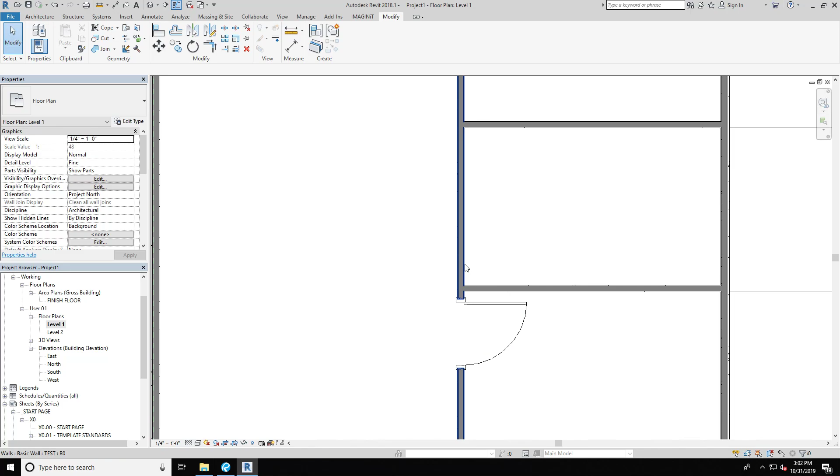And let's say we want to add a door to those as well. We hit DR for our door command, and then just include a new door. And let's say we want the door on this side to be the same offset as that wall. Well, we can mirror it.

The mirror command is these two buttons here. This one mirrors by picking an axis, which would be that, or you just pick an axis, or this one you would have to draw your own axis. And the shortcut for that one is DM. But we can mirror that door over there.

And we can also copy the same way. That function is located in all of these functions that allow you to modify things, in the modify tab up here. And they are here in the geometry and in the modify tab. So for moving, aligning, copying, offsetting, scaling, all of these functions are in the modify tab. We can mirror by picking an axis, mirror by drawing an axis, we can offset, and also a quick little tip - if you ever get stuck or don't know what a function does, just hover over it for a little bit and a video will pop up telling you what it does.

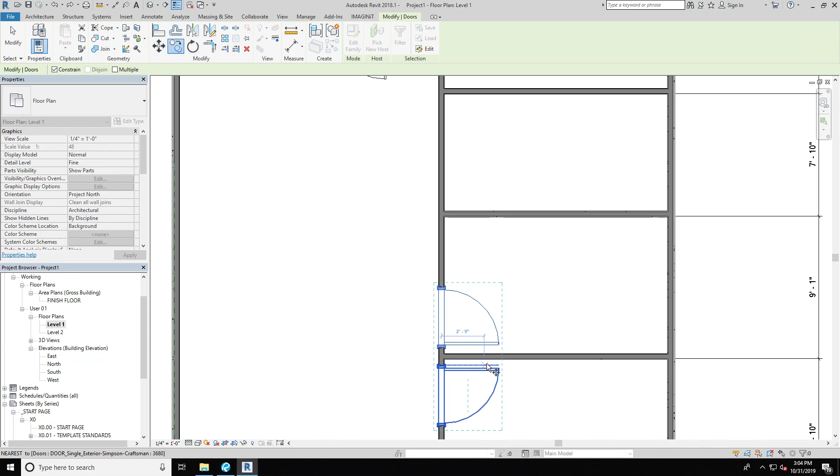So let's say we want to copy those, and that's this button here, the little circle with two circles. We hit that button, select our objects. Well, you would have to hit that, then just copy. I hit enter, by the way. And there we go. Or the easier way is to select both things and then hit the command for it, which is CO. And that way we have all the doors we need.

But we also have this opening here in our wall. We can do that one of two ways. Let's say we wanted to break this wall up. We would go to the modify tab and use the slice tool, which is, where is it? And there it is, split element, and it shows you a little knife, and then you can split these into two separate walls, bring it, and you have your opening. But then when you see it in 3D, that wall is split all the way up, and that's not what you want.

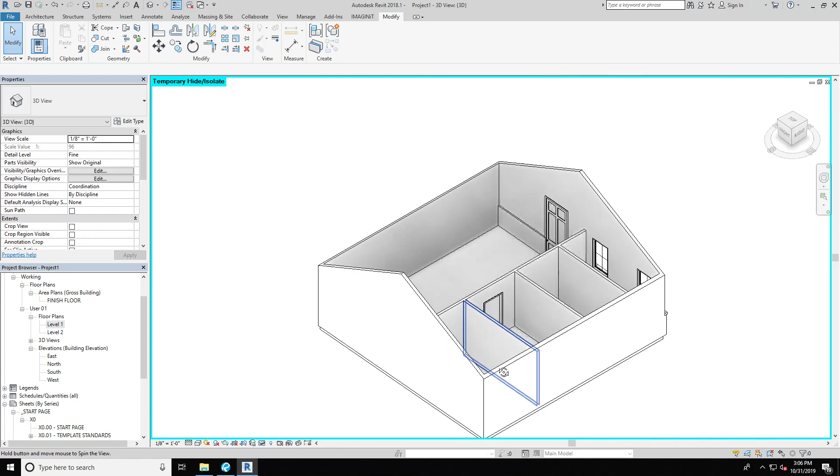So let's go back, and let's undo what we did. We can also load in families for openings. There we go. So we have an opening family here, and it's a model component that will host to your walls as well. And it will create that opening for you without completely destroying your wall. And there we go. So you have an opening and it has a trim.

That's just one of many families that you can find online or create yourself. Honestly, if you get to the point where you're creating families, that's actually a good thing, because it allows you more flexibility and creativity to create the types of projects that you want, depending on what your focus is.

Then we can add more families by going to the architecture component button, and the shortcut for that is CM. And then here we'll have a list of all the types of families. They include anything from your lighting fixtures, your furniture, so beds, desks, tables, chairs. Trees are also in here as well. People, so they're called entourage. Cars, which sometimes those I think are just called generic models.

We have our millwork, our cabinetry, countertops, all in here as well. Shelves, anything you can think of. If it's created by someone out there and you can find it and download it, then you can add it to your project. Let's say we wanted to add this shelf here to our project. And there we go. It's a weird looking shelf. I have no idea why it's doing that.

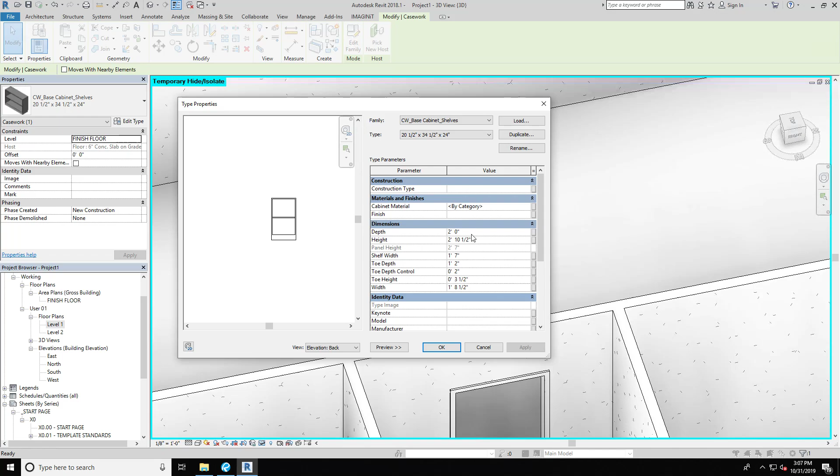But we can place it in, and here's another thing, this may go over your head, but if it has parameters, you can change them. So this one, we can change the depth, that funky looking depth that it has there, and change that to be 1 foot if we needed to. Let's just hit apply. There we go. It looks even funkier. There we go. We have a decent looking shelf.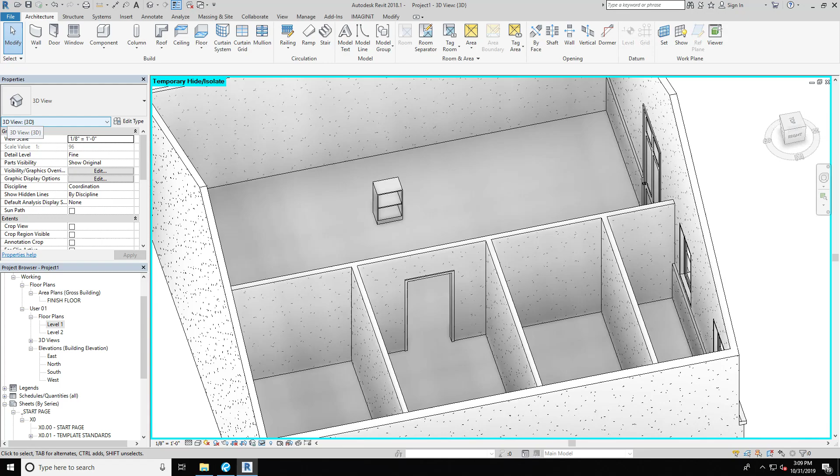How to do a slice graphic view. What's a slice graphic view? Give me a second, folks. Oh, a section view. Okay, yeah, sorry.

Okay, so now we have the house. Let's say we're satisfied with where it is, and now we want to create other components and create other views. In order to create a section view, which shows you what this house would look like as if we cut it down at some point, we would go to our view tab, and there we can find our view options. We can create these different types of views. We can create a 3D view, camera or walkthrough,

and section, which is the one that I'll jump into right now, create a callout, which is a little rectangle that will just call out a certain portion of the plan. An elevation, which selects the walls and creates a new view of that. Drafting view, which is a basic view where you can draw almost anything and it doesn't have to be real, but we use them for basic duplicated details that we use all the time.

So this section view is actually what we're going to use right here, and it's showing us exactly what it does. It cuts the building by where it's running. Let's bring it to here. And we've already created the view. That's it. Now to access the view, you can double click it, and there we go. We have a section cut through that house. So we're seeing the inside of that house where we modeled it.

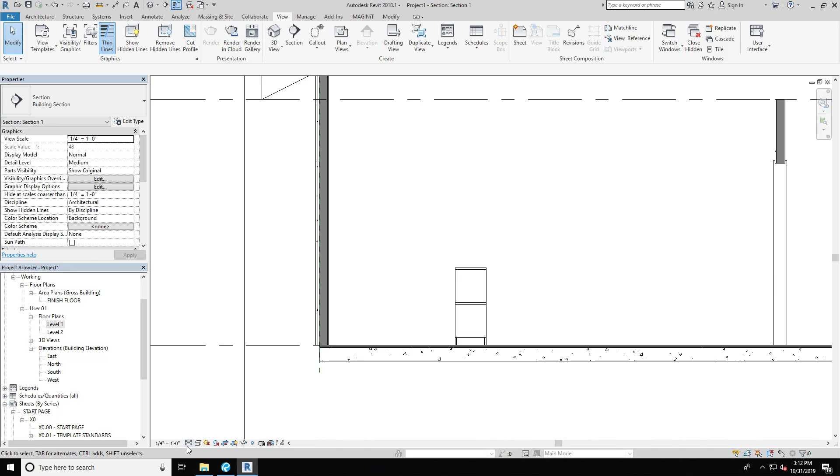And we can change the detail definition of this view to show different stuff. So, to change the detail level actually. So if we want to see it coarse, it looks super basic, but we want to see it fine, so that we can see all the layers and details inside. And here we're cutting through that cased opening.

So right here we created that section cutting; this view is created by this section cutting through there. And then we can change this depth here to show us a little bit more of the house. So if we wanted to see everything beyond in section, all we would need to do is just pull that arrow. And same thing, it's called a building section, which you see up here in your properties tab. And they are used to create your building sections that you would represent on your construction documents.

Now, you can also do that in 3D. Well, not really. No, you can't. It's a yes and no kind of thing. Let's say you want to see a section of this house in 3D. You can't do it by hitting that button that we hit, but there is an option in the properties tab over here, as long as you're in this 3D view. It's not in graphics, it's in extents. There it is, in extents.

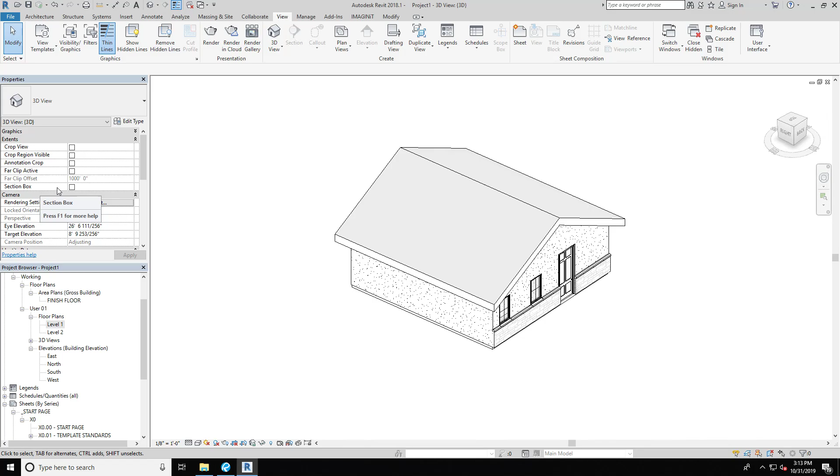And you just check this box, and you'll get a box around your project. And you can move these, and wherever you move them, as long as it's going through your building, it will create a 3D section view of that. So if you wanted to show this to a client or use it as an architectural conceptual drawing to show it to somebody, then you can cut your building.

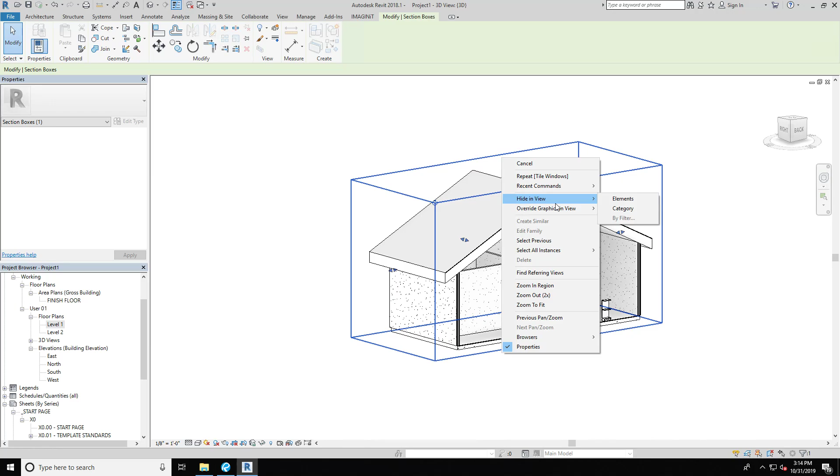You can also hide it, just right click, hide in view and element. The simple command for that is EH, which is element hide. And then to get rid of it and stop it from cutting your building, you can just uncheck this box or pull it away. What is this? But yeah, that's pretty much it for this house and some of the section views.

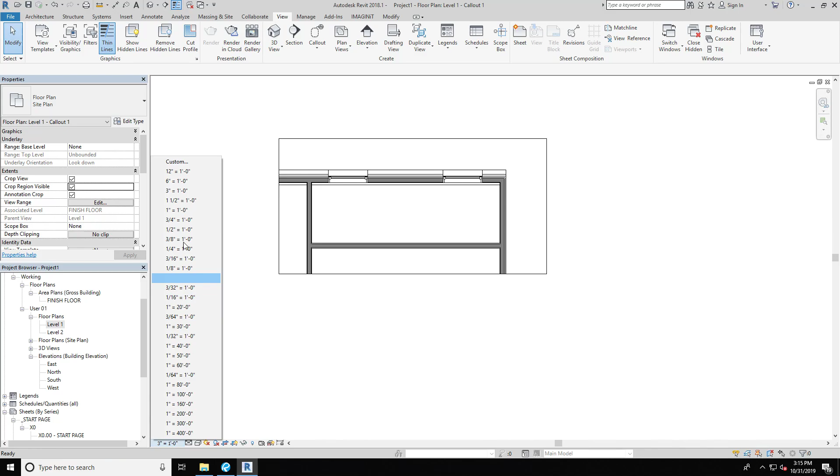I will go back through the views one more time, just because there's a couple more to cover, like the callouts. Let's say we want this closet here. Well, we have a blow up of that and only that, and it's at a different scale that we can change here. And the information here will only fill whenever we put it on a sheet, but that's not part of the topic today.

Main point is once you have all your views that you need, your floor plan, you pull it in onto a sheet and then place it somewhere. The same thing with your section, which most of these are up here. You can pull it onto a sheet here. It'll automatically get this view title.

And then if you don't want to see these things, you can just hit this button to turn on the crop region and then bring it in, and you can hide some of those elements. Some of the elements hide like the elevations because it's cutting right there, and as long as we pass that line, it will disappear. But I hope that helped you guys.

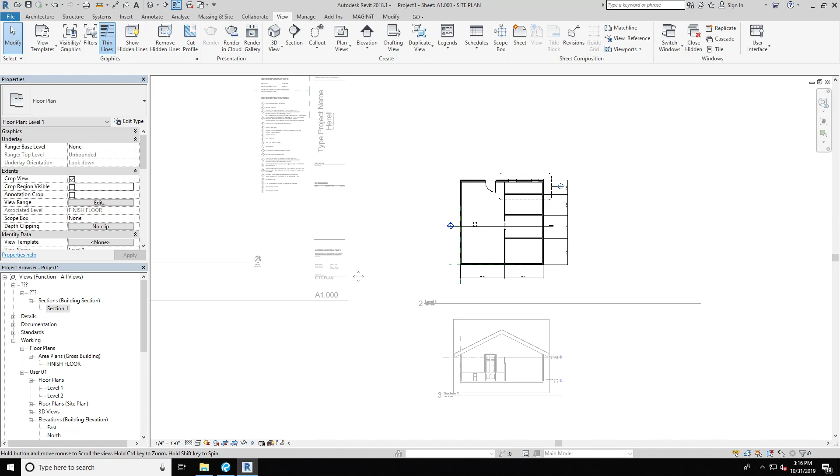Oh wait, there's a ceiling question. Alright, well, since we're in this view, let's create a ceiling. Same thing, let's go to architecture. We have a ceiling button, and then there's one of two ways. Once we select it, the default is automatic ceiling. Once we hover over a space, it will want to fill that space in with the ceiling. That's going to be 8 foot off the finished floor.

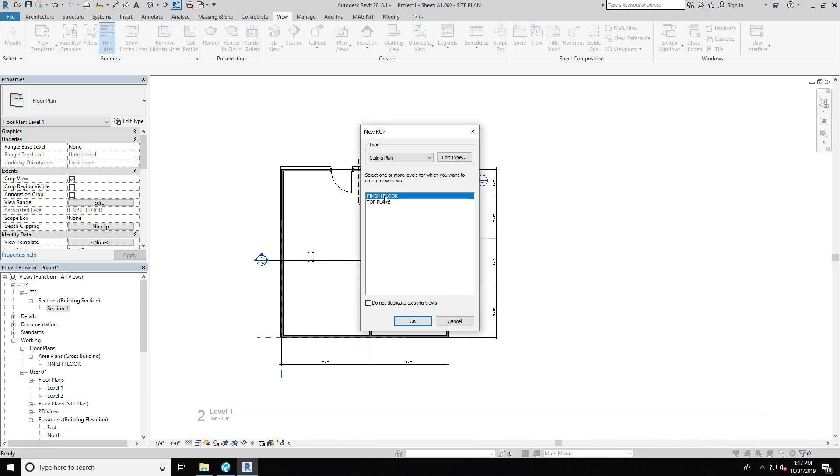We place it. It's not visible in this view because it's too high up. So what we need to do is create a reflected ceiling plan. We don't need that one. We need a reflected ceiling plan of the finished floor. And there we go. We have a reflected ceiling plan with our ceiling that we just created.

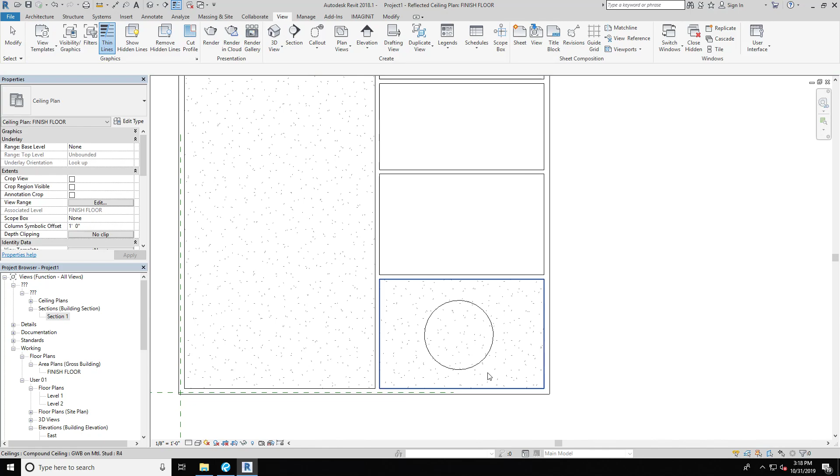The second way of creating a ceiling is by sketching it. And let's say we want a little circle ceiling in there. No, not in there, that's a closet. Say we want a circle ceiling in there, and then we want a separate ceiling up there. Where's my ceiling button? Well, there we go. So we have two ceilings overlapping, but we want this one to be higher. Let's say we want this one 10 feet off the ground, and it's out of view.

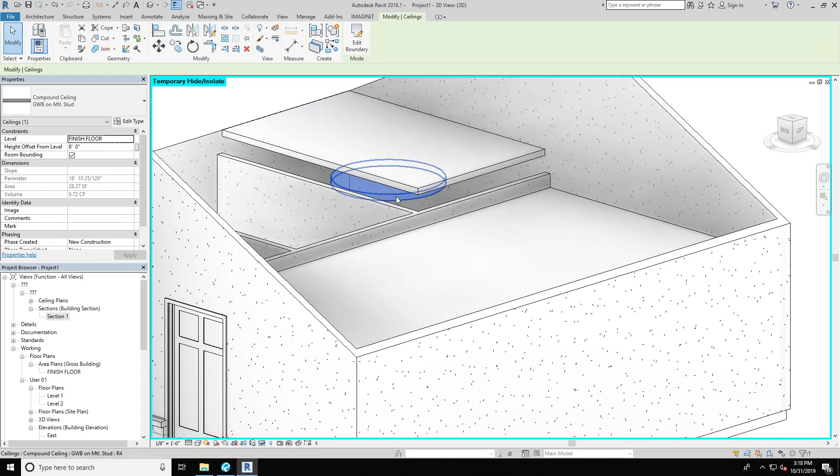There we go, we got our ceiling and our roof too. And so when we look at this in 3D, we have our ceiling that's at 10 feet, and then we have a little cloud ceiling. And that's pretty much it on modeling ceilings.

You have two options. You can fill it in automatically, you don't have to draw a thing, or you can draw whatever you need. You can draw squares, circles, rectangles, ovals, whatever you need to fill in your space. It depends on what you design that would tell you what you need.

Is there anything else that you need me to cover? Oh, foundation footing. Okay. Cool.

Alright, so we need to add a footing to our slab. Let's select our walls and hide them temporarily. Hit tab. You can select all the walls in a chain command. So you select one, hit tab, and there you selected them all. Temporarily hide them by hitting HH. And you've turned on this temporary hide isolate visibility option.

Now you have your floor, and we want to add a slab edge, a footing, but basically what they're called here is a slab edge. And you would go to the floor command, but instead of hitting it, you hit the drop down arrow, and then you can create your floor slab edge by picking it. And then you would have to create a new profile and a new type that is a little bit more complicated, because you would have to create a family, which I won't be covering right now.

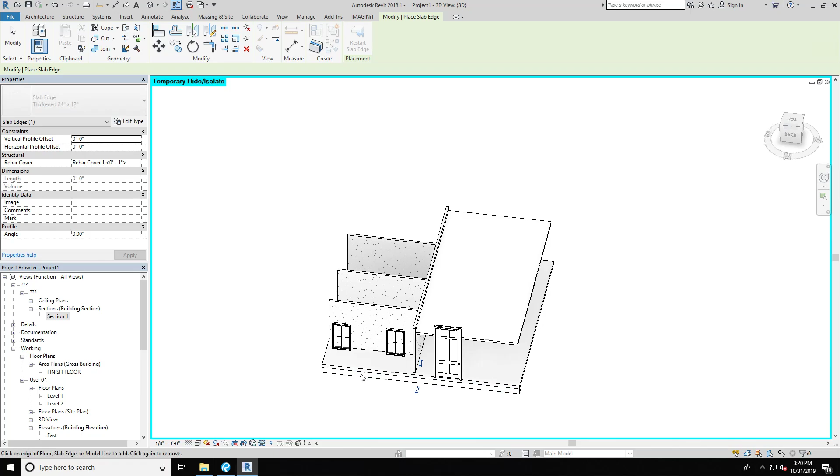But let's say we want to add this 24" by 12" slab edge. There we go. We just pick our line, our edge of slab, and we have our footing. Simple. Since most of these things are already created, it makes our job a lot easier to do this.

But if a lot of these elements aren't created, it's a little bit harder, and you would have to hunt and fish out a lot of the content that you would need to model it correctly. Or you can create it yourself. It gets a little inefficient when you have to create everything.

Most of the time, Revit users coming either out of school or straight out of CAD just draw everything in the views as detail components, as just detail lines or filled regions, and filled regions are another way of saying a hatch. So let's say we have our floor slab there. We would create a filled region by going here. We don't want a masking region, and we create it by drawing over our model.

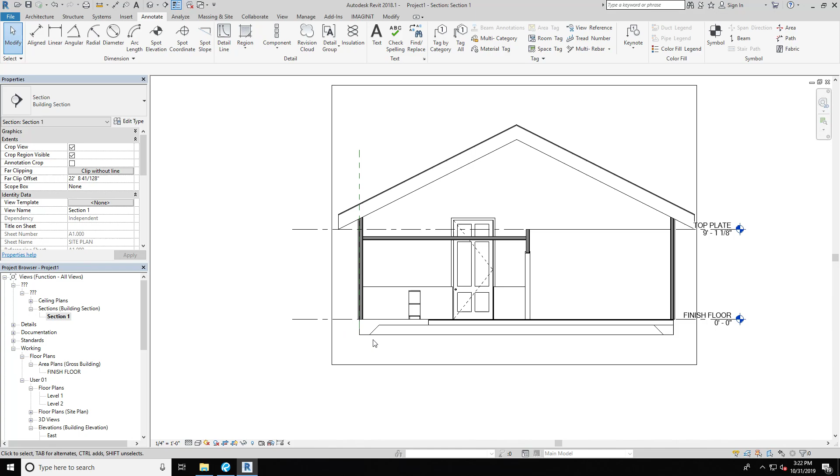It's not a straight line. It's kind of bothering me. There we go. So we have our filled region there. And there we go. It looks just like concrete because it's a hatch pattern fill that shows concrete. And it looks correct in our section, in our view, but model wise it's not super correct. But that's okay, because most of this stuff will have to be covered in our detailed construction documents.

Let's see, I don't know what else we would need. Probably fill and sand. Can align this to that. Oh wait, no, I'm in the command. Never mind. You would have to create a separate filled region. And the same thing applies to filled regions. You go over here and you have a multitude of options. Now obviously we don't have plywood, we need sand or something. Or gravel, depending on how you build houses.

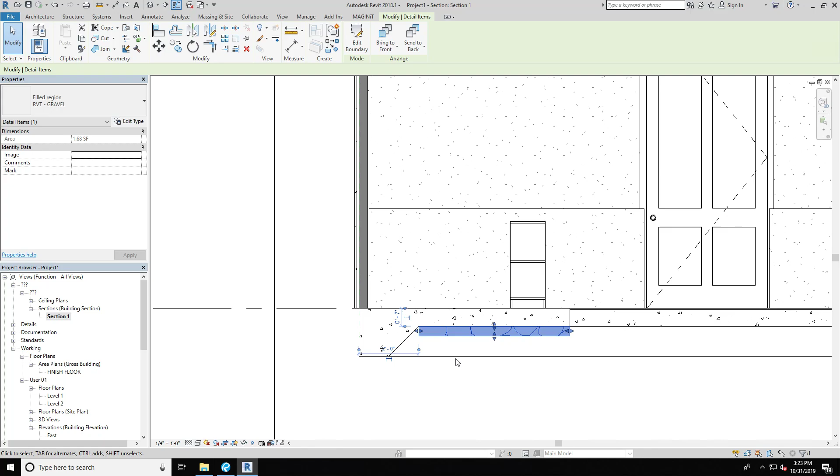And then we can also change the scale of this drawing. Normally it's maybe 1/2 inch. And there we go. Is that door still 10 foot? Oh my god. There we go. Alright, so I think that pretty much covers it.